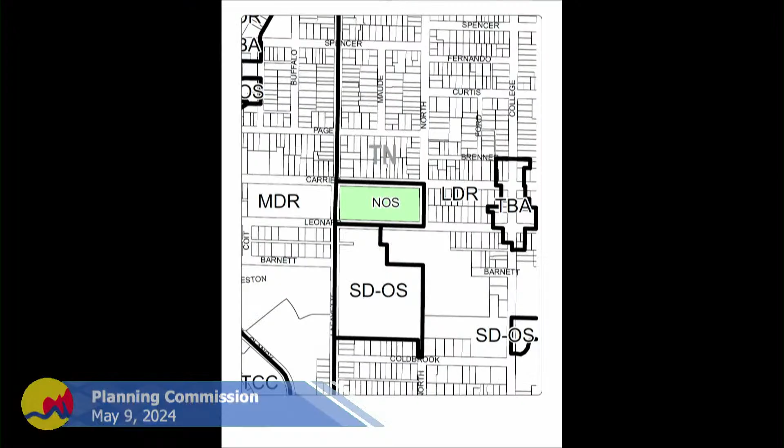The first item on the agenda is 385 Leonard Street Northeast. The applicant is proposing construction of approximately a 186 unit, 5-story apartment building with a commercial component on the same parcel as the existing Sun Title office building, with some shared uses on the site. A parking waiver is also requested.

Along with the Sun Title offices, the YMCA of Greater Grand Rapids uses a previously existing commercial kitchen, both of which will continue. The reason this is going forward to the Planning Commission today is because the property is currently zoned NOS, Neighborhood Office Service, and the Neighborhood Office Service could not support the project as proposed, both from a density standpoint as well as height. This also would facilitate the mixed uses on the site.

The property is zoned NOS, and we've got residential to the north and east, medium low density residential. We have Mary Waters Park and Grand Rapids Public School to the south, and I believe this school is slated to be closed. To the west, we have St. Alphonsus Church, and we have a couple of zone districts there. To the west of Lafayette is the MDR zone district, mixed density residential, which allows a higher density of residential uses than would be found in the TN-LDR, low density residential zone district. The park to the south is zoned open space.

Sun Title occupies the existing improvements on the site. I want to tell you a little bit about what used to be on the site, this building. We did some quick research this morning with a couple of other planners along with archives, and we found that it was the St. John's Orphan Asylum, and it was actually where the Sun Title building is.

We had assumed it was over on the west part of the site where this new building is proposed, but that is not true. We could not find any buildings ever being constructed there. It looked like St. John's Orphan Home had several additions over time, and it looked like this. It was pretty amazing.

So anyway, this is what was on the site previously. It was a pretty substantial building, and it was fairly tall. We just wanted to show you. And this is what is being proposed today. This is also a substantial building, proposed on that west side of the site, the vacant part which we think never has been improved. It ranges between 4 and 5 stories in height because of the grade.

The matter of the grade is really a substantial part of the story here, which the applicant can cover much better than me, but that does influence the design of the building.

The entire property, including the existing improvements on the site, is about 3.4 acres, and the existing building is about 30,000 square feet. It's pretty sizable, and it has 58 parking spaces. There are retaining walls around because of the grade change.

I do want to point out that in the past, up until 2021, this site was zoned TN-LDR, like the property around it. That's because it was the St. John's Home, and then Hope Network bought it, but it was really kind of an institutional use. It was residential, but institutional, so TN-LDR was appropriate. Then Sun Title wanted to purchase the site and occupy the building, and NOS was an appropriate rezoning, so they've been using it since then.

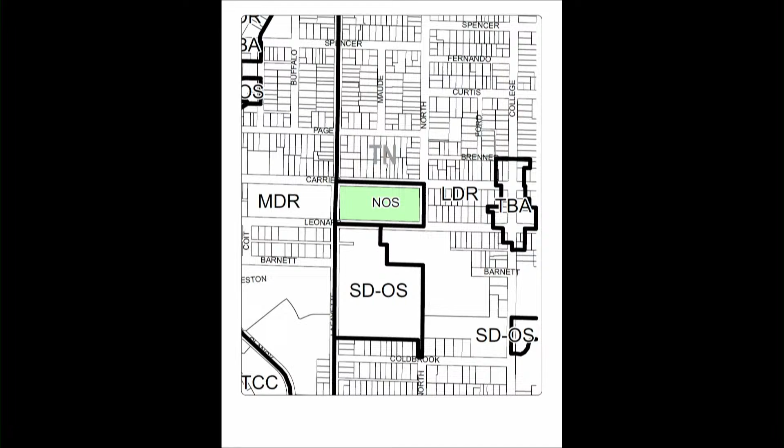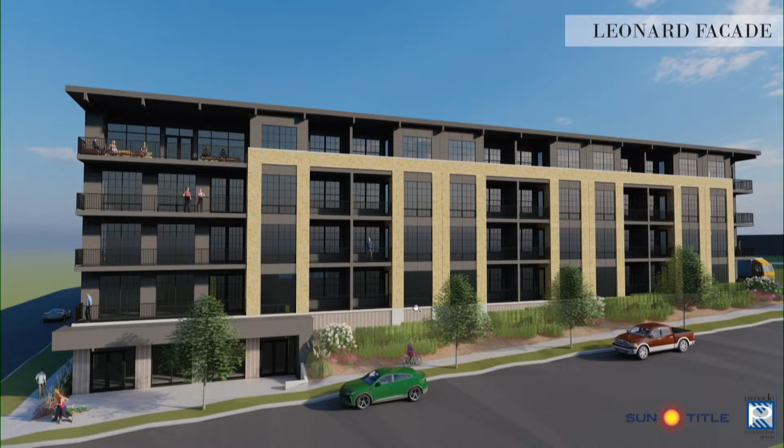So a 5-story courtyard-style building is proposed on the site. It will vary between an appearance of 4 stories and 5 stories, depending on where on the site you are. You can see it's tallest at the corner of Leonard and Lafayette.

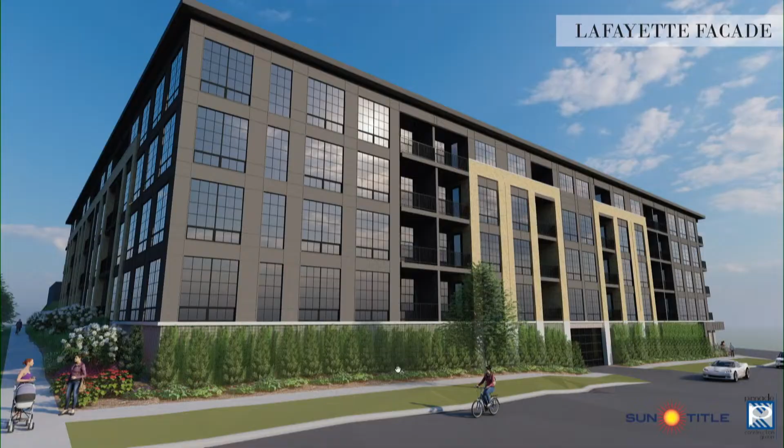This is the move-in area, the loading zone for move-ins. Actually, I'm going to go back here.

At the corner of Lafayette and Leonard is a small commercial component, about 622 square feet. The applicant intends to have it utilized as a coffee shop, at least initially.

Relative to parking, parking is proposed in an underground, well, partially underground deck. That's what you can see at this lower level. This slide is showing the Lafayette side, and approximately in the middle is the proposed access to the parking garage. I do want to mention that the location of the parking garage entrance was actually decided with input from Mobile GR.

The plans themselves show 181 dwelling units. However, the applicant is asking for approval of up to 186 units. That would allow them some flexibility for reconfiguration of units depending on market demand. I should mention that the parking analysis was based on that higher number.

86 of the proposed units, if we're going on the 181 units as the plans are shown, are proposed to be studios of about 400 square feet, and by our definition, those would be micro units. 91 are proposed to be one-bedroom units of 520 to about 650 square feet, and then 4 two-bedroom units are proposed with 900 square feet each.

The units are proposed to have a balcony or a porch, most of them at least. There'll be a lounge, and the Sun Title building does have a large gym, as it was a children's home, and I understand that use of that gym space is proposed for the residents. The applicant can talk about how that will be outfitted - I'm sure it will be a fitness gym for use of those residents.

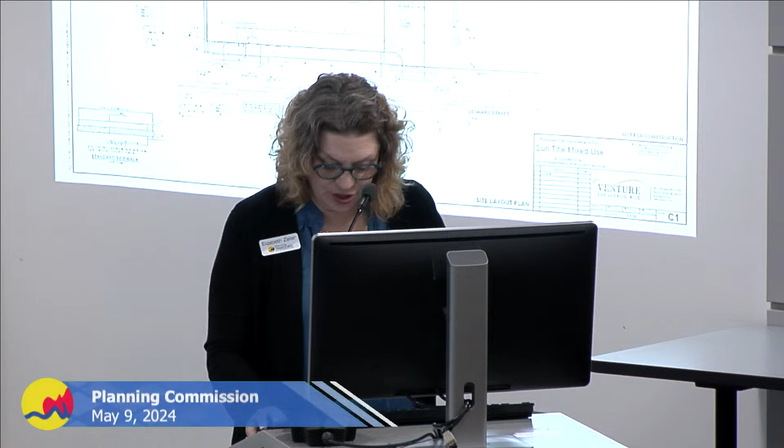So in the packet, you will see that on Leonard Street, a setback of 20 feet from back of curb is proposed. The existing Sun Title building is about 30 feet, so it's a bit closer. On Lafayette, the St. Alphonsus building is about 30 feet from back of curb, and they're proposing a range of 19 to 23 feet - again, about 20 feet there.

But because, I'm assuming it's because the road isn't aligned correctly, it varies according to the location on the site. And then Carrier Street - now, Carrier Street is where we've got residential uses across the street. On the north side of the street, there's a required building line or an established building line of those homes of about 28 feet. The Sun Title building's 23 feet, and they're proposing 30 feet.

So the Planning Commission should please look at what's surrounding and determine if the proposed setbacks are appropriate. I do want to correct something in the staff report. I neglected to add that in TN districts, which surround this property, the Planning Commission can go to a setback to the lot line of 0 feet.

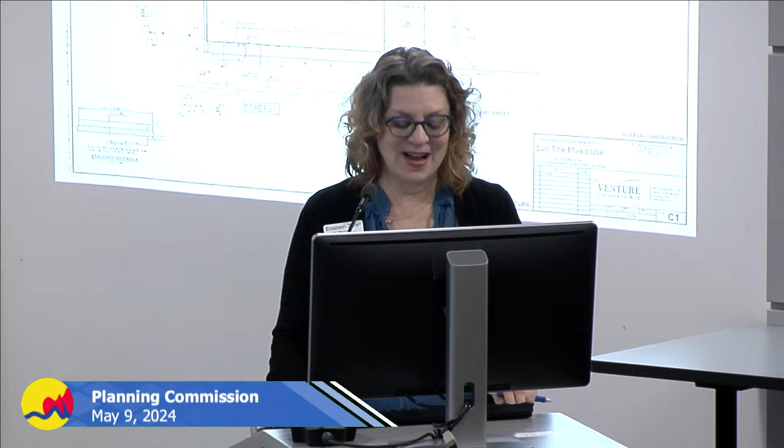You may notice that down at the southwest corner, we have a setback from the lot line of about 2.5 feet. It's 19 feet from back of curb, which is what we use when talking about a required building line. But for the purposes of the PRD, it's about 2.4 feet, 6.7 feet, 9.6 feet, and 10.7 feet. So in sum, the Planning Commission does have the discretion to allow the setbacks as proposed.

I'd like to talk a little bit about green space. PRDs have a fairly low green space requirement of 15%. The NOS requires 30% for residential projects and 20% for mixed use. The applicant is proposing 29.8%. I would ask that the Planning Commission establish a number we can go on in the future in case slight changes need to be made. In the draft resolution, I suggested 25%, which gives them a little wiggle room if they need to add more sidewalk or something like that. But they are proposing 29.8%, so if you want to go with that, you could as well.

Additionally, for tree canopy, residential, the NOS zone district requires 26%, the PRD requires 12%, and the applicant is proposing 34.8%. So again, I suggested maybe 26%, which is the NOS requirement, but it's up to you.

Relative to height in this zone district, the NOS zone district allows no more than 2.5 stories, and the PRD allows 55 feet and 4 stories. But of course that is something that can be modified. So we're looking at between 4 and 5 stories, and depending on where you are, the height ranges between 52 and 59 feet, so kind of in that 55-foot range.

Materials are brick and fiber cement panel. The building has been appropriately designed relative to pedestrian entrances. We've got that at the corner. And transparency—lots of transparency. We have transparency for that commercial use, almost all windows, and then the residential portion has a significant amount of transparency as well.

I would think that the discussion about transparency might really focus on the portion of the parking structure that is visible, and that might also be part of the facade variation portion of the zoning ordinance. The applicant could probably talk about this in greater detail, but you can see on these renderings that there is some detail that continues into the concrete of the parking deck to provide some relief. So that pattern is supposed to provide some visual interest and break up that expansive wall.

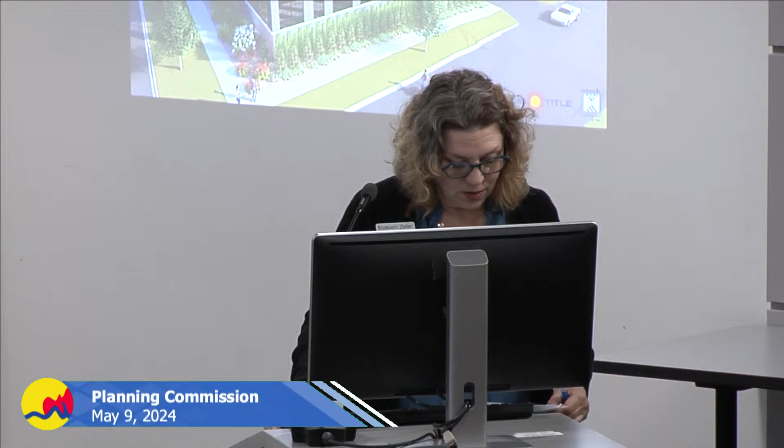Relative to density, the NOS zone district does allow residential uses as a primary use—it doesn't have to be a mixed-use development. You could do a residential development in the NOS, and on this entire site, including the Sun Title portion, the site could support up to 155 dwelling units. 186 dwelling units are being proposed, so the Planning Commission should consider whether this density is appropriate.

Some things the Planning Commission may wish to consider are transit, the availability of transit in the vicinity, and the fact that the current zone district does allow a relatively high density. You might also wish to consider that a significant number of the units are intended to be quite small—they're intended to be studios, and by our definition, they are micro units, about 400 square feet.

I'd like to mention that in the other mixed-use commercial zone districts, such as the TCC, the TBA, or the C zone district, we actually don't even count micro units toward density. So the applicant is not asking for any kind of waiver along those lines, but I just want to mention that because I do think it is something that we allow in other locations.

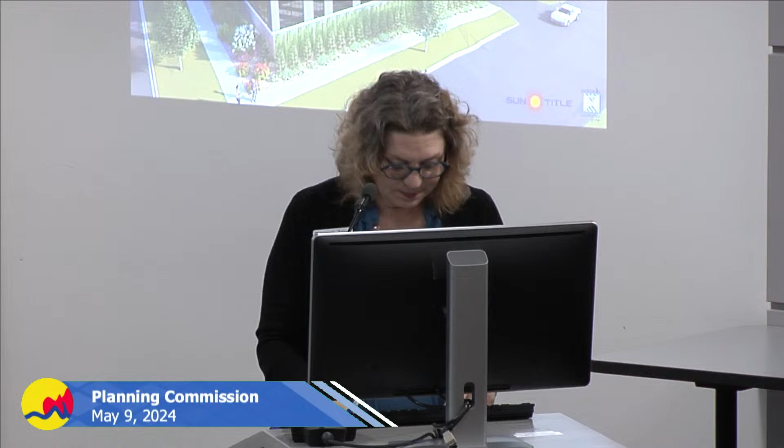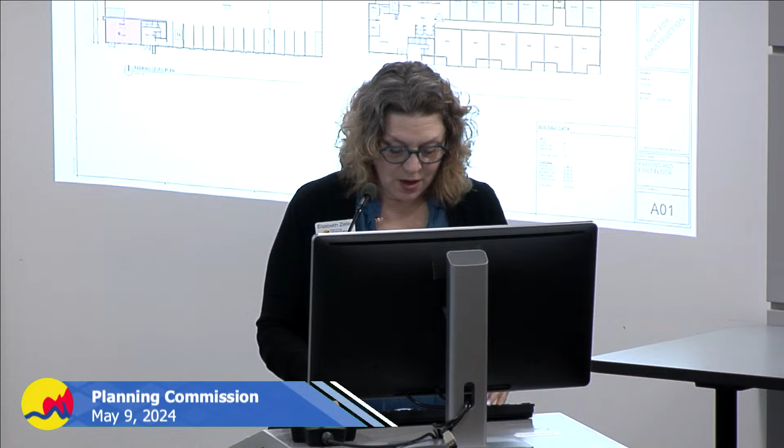On to parking. We have an interior parking structure proposed to have 78 spaces. Using either the PRD or the NOS parking requirements, which are higher than say our TBA or TCC parking requirements, 283 parking spaces are required. So it has a significant deficiency.

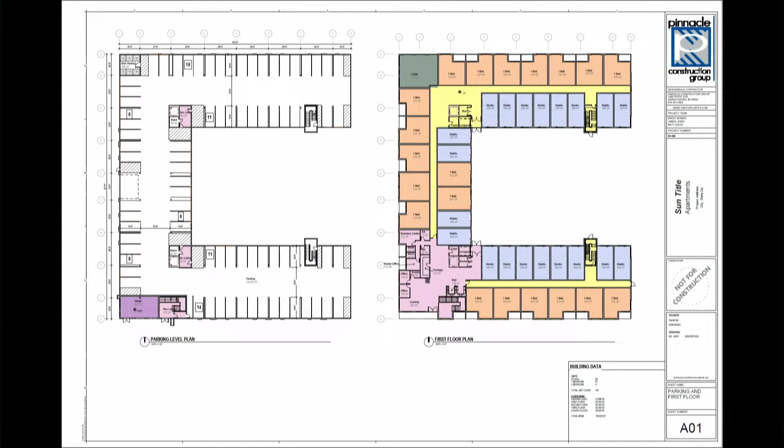The applicant is requesting that the parking be reduced based on available on-street parking, proximity to transit, and alternative vehicle parking. On Leonard, there are two bus lines that serve the site, so the site is well served by transit. There is on-street parking, but not all around.

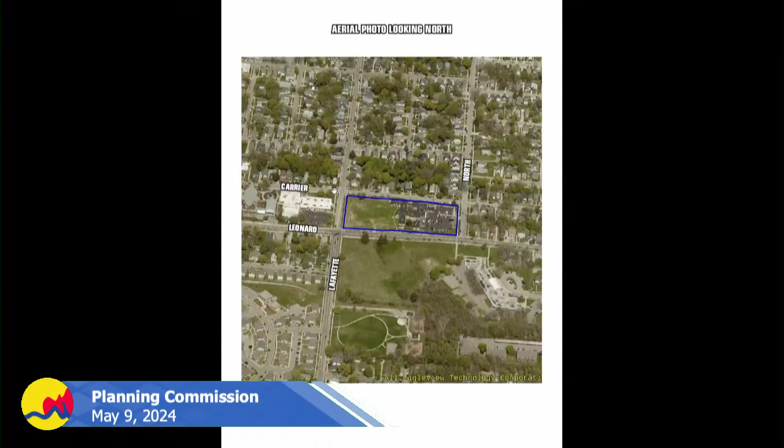I'll go back to the aerial photo. Leonard and Lafayette do not have any on-street parking. Carrier does, however - I meant to take a screenshot and include it here - but on the portion of the site that's going to be developed, we've got green infrastructure there. There's a rain garden, so that must have been done when the street was redone. It's not possible to have parking immediately north of the site. There are parking spaces adjacent to the Sun Title portion.

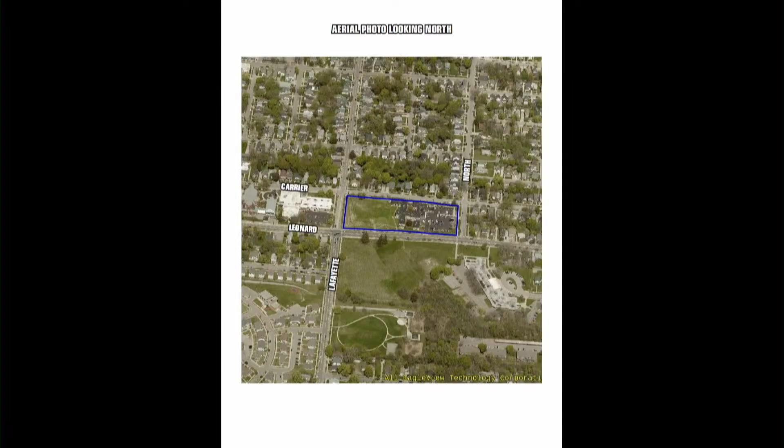Six alternative vehicle parking spaces are proposed within the garage, and that is a reduction. There's also a parking reduction allowed for micro units, where parking for micro units can be reduced by half a space, as long as two enclosed bike parking spaces are provided per unit.

So the applicant is not proposing - they're not calling them micro units - to have any kind of waiver for density or parking, but again, I did want to mention this to you.

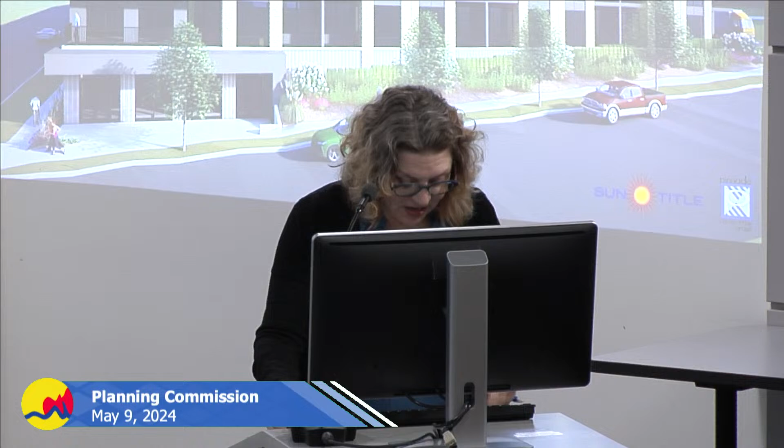That being said, the project won't meet the full bike parking requirement. They are proposing 56 bike spaces inside, and for a development of this number of units, they would need 103 bike parking spaces. So they're asking for a waiver of 47 bike parking spaces. You might balance that with that micro unit density and parking issue. I don't have an answer for you, but it's something to think about.

Relative to traffic impacts, the applicant did do a trip generation analysis. They worked with Mobile GR on that. I did not include that in my staff report, but Mobile GR did review that analysis and agreed with the conclusions of the letter that trip generation for this project is anticipated to be minimal and does not warrant a traffic impact study.

I believe we might have John Bartlett here from Mobile GR, should you have any questions about traffic impacts.

On to signage. The applicant requests that this retail component, the uses that would be there, be subject to the use table for the TN-TBA zone district. And it would be appropriate to also assign TN-TBA for signage. Staff is amenable to that - we feel that would also be appropriate. It is a very small space.

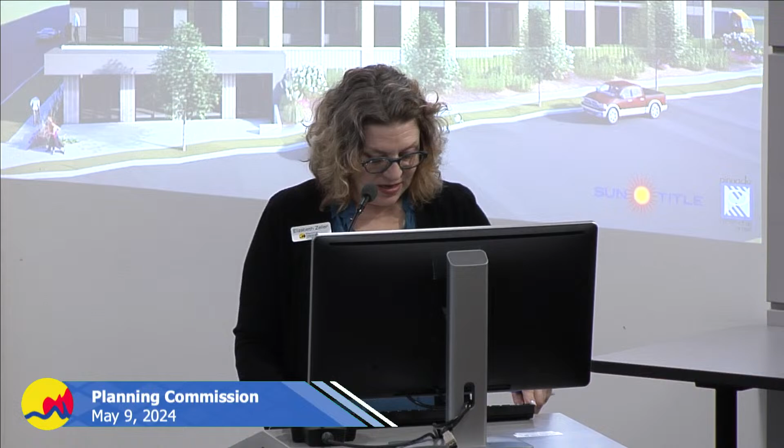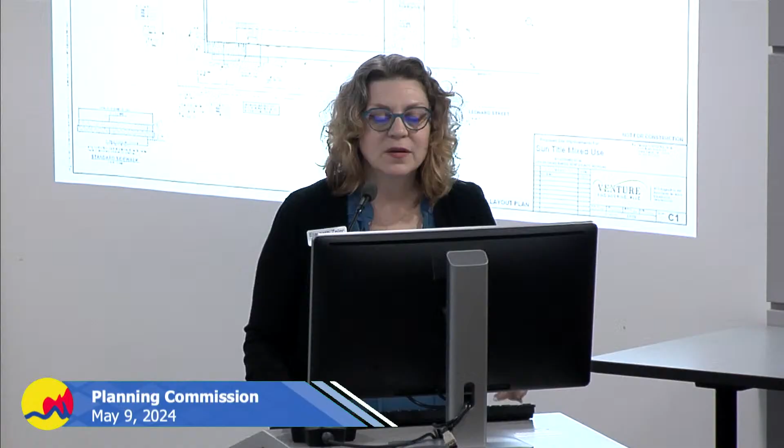Did you have any questions for me on this portion of the site before I move over to the Sun Title portion? Okay. Let's see, not sure what slide I should use here. I will use this one.

As I mentioned, Sun Title is a title company. They own the site and intend to continue their office use on the site. They've got 58 parking spaces.

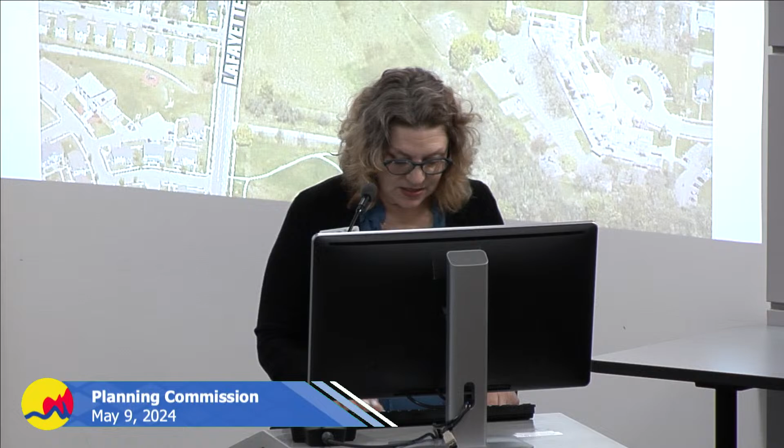You know what, I think I'll go back to this aerial photo. They have 58 parking spaces on site, and that's 29 fewer than what is required for the significant amount of floor area of the office use.

And we granted Sun Title director review for deferred parking. Sun Title said, we don't need as many parking spaces as what you're requiring, can we just build them if we need to? So we did a parking deferral agreement, and Sun Title today is saying we're never going to need these spaces, and we're asking you to formally waive those additional 29 parking spaces.

I can have the applicant talk a little more about that if you have any questions. One thing that we might want to consider is just to confirm that the accessory use of the YMCA using the commercial kitchen will not have any conflict with parking demand there.

Relative to this portion of the site, the applicant is requesting, and staff finds it appropriate, to establish the NOS zone district for both uses and signage. So we'd have sort of differences on the two halves of the site.

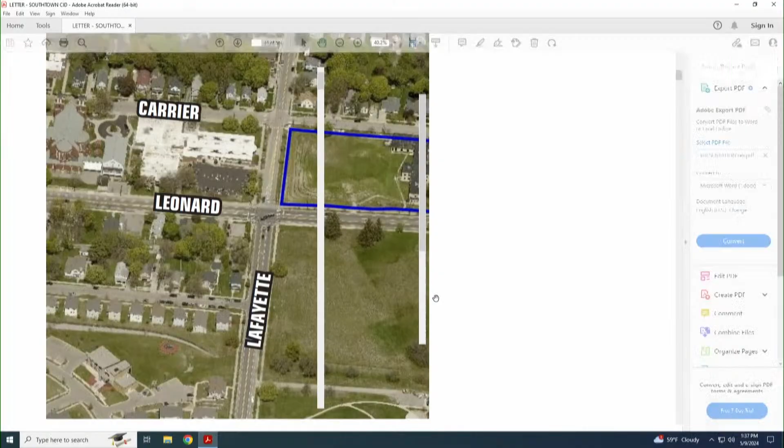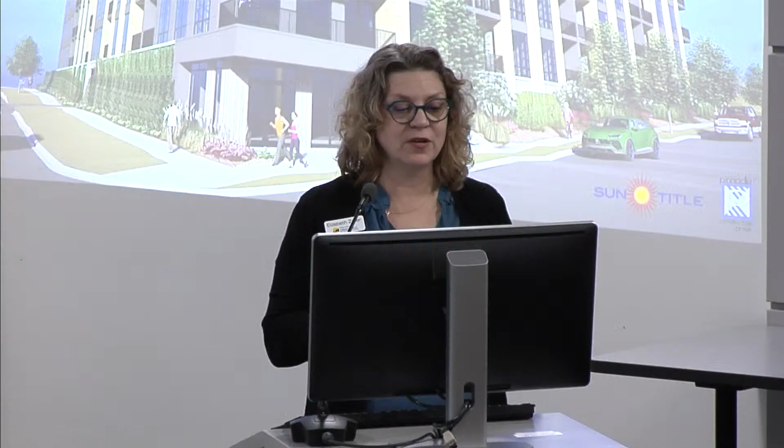So, in sum, we're looking at a primarily residential building with up to 186 dwelling units between 4 and 5 stories. I will be happy to answer any questions or turn it over to the applicant, and I think they'll be able to better describe why they came up with this design and some of their approaches toward dealing with that grade change on the site.

Any questions for Elizabeth? I have one. If the space for commercial doesn't work out as commercial, would they be permitted to put in residential in that space?

Well, that's an excellent question. As proposed, we don't really address that, but that would be an excellent thing to consider and maybe incorporate into the development or into the conditions of approval. I don't know if we'd want to add one more dwelling unit. Right now we have, well, we noticed for...

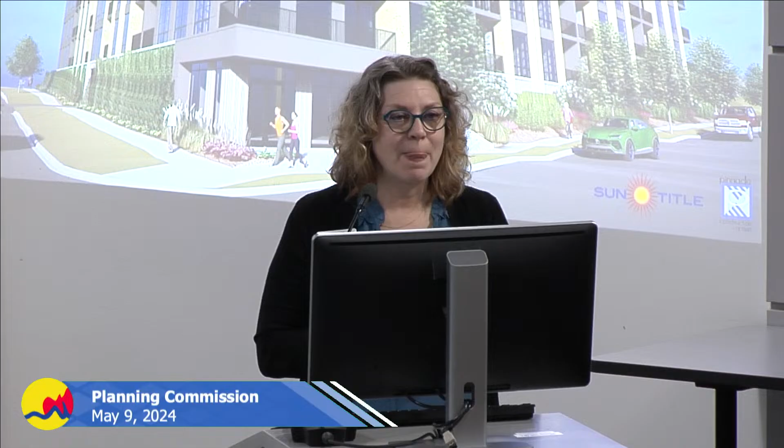186. I think right now, because of the way it's been noticed with the specific number of parking waivers as well as the number of units, any increase in residential density, and because it's a PRD, would likely necessitate it to come back before the city for that kind of modification. Unless they stay within the 186 dwelling units. But potentially, then it impacts the amount of required parking.

Oh, no, it wouldn't. I'm sorry. You're right. And I think it also depends on whether or not that commercial space is material to the decision of whether or not you feel that it meets the standards. If it's immaterial, then we have more flexibility. I'm thinking, of course, of other developments who have come back to request that. So, thank you.

Shall I turn it over to the applicant then? Okay.

Yep, so I'll take this, but you can advance and go back or use this. I know where everything is on here, so when you're talking, I can advance to what you need. I appreciate it.

Thank you. All right, good afternoon. My name is Lawrence Duttler. I'm one of the co-owners of Sun Title. I'm here with my business partner, Tom, and the folks from Pinnacle who are partnering with us on this project.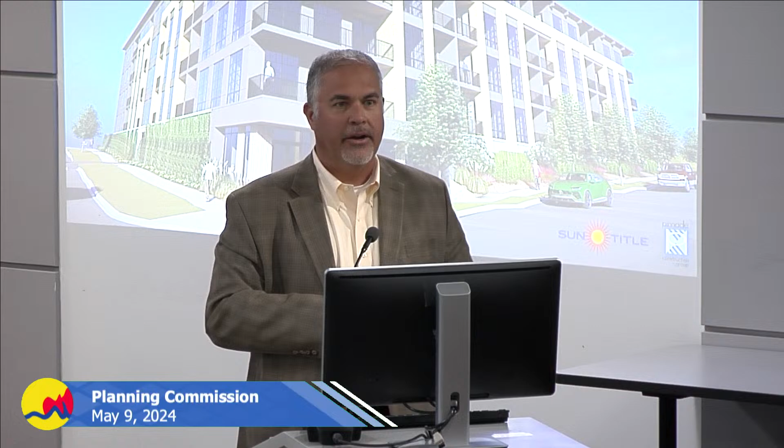I thought it would be good to start from the beginning of how we acquired this entire site. Our journey into Creston started in 2003 when we purchased our first building right there in the core of Creston. At the time, we liked the neighborhood, and it was a perfect spot between his house and my house. It was just great, and we fell in love with the district.

We've been there for over 20 years, improving buildings and houses and things like that. So we love the neighborhood. We've got great relationships, as you can see from the letters of support, with the neighborhood association and the business association. It's always been our vision to turn this entire community into the gem it has become. It's amazing looking at some of the other developments going on right next to our Sun Title building. It's been beautiful, and we're excited about what's happening in Creston. It's always been a great neighborhood, and it's starting to get the attention it deserves.

We were in the middle of COVID, running out of space at our corporate headquarters. We had purchased a number of buildings on the corner of Spencer and Plainfield and just started running out of space. So I did a very scientific approach, knowing we wanted to stay in Grand Rapids, stay in Creston, and I went to Google Maps and zoomed out. There was this big spot right by us, and I zoomed in, and it turned out it was owned by Hope Network at the time, and it was for sale. It was part of their Pivot program where they were helping people coming out of drug rehab or prison re-enter society, so they were using it as quasi-residential.

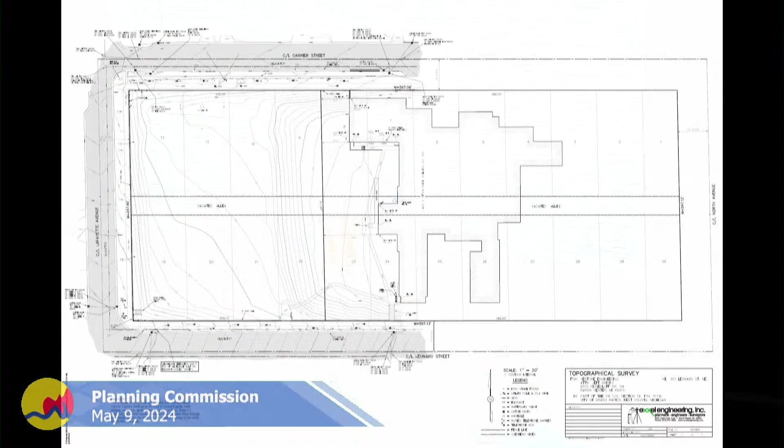We don't have anybody right now that's even considering parking on the street or anything like that. So from a parking perspective, it's a little weird because if you just look at the overall square footage of the building, it takes into account this enormous gym, our big break room. What you don't see here is there's a gigantic interior courtyard that we've got picnic tables and umbrellas and nice landscaping area for people to have lunch and the like. So what you're seeing here is the building outline from the outside, but you don't see even just the interior space there. It's a unique building.

Also from a parking, when we start thinking about transportation, we were working quite a bit with Pinnacle just on the parking spaces and what that impacts, because we work there. We've got offices all around, and we work and live there, right? So it was interesting, I actually went onto the bus routes, and I'm like, okay, if we say we're on bus routes, what does it really mean, right?

Well, you could take a bus from this building to Family Fare, right down the road. It's 9 minutes, 1 bus, no changes, right? Just a straight shot, a one-shot approach. You can get to Van Andel Arena, it takes you 14 minutes, and it's 1 bus, no transfers. You can get to the Medical Mile, 9 minutes, 1 bus all the way down. So it's a beautifully located building.

And as we were looking at the size of the apartments and the affordability of these things, that was a key component with our employees. Title insurance still, we hire a lot of folks that don't go to college and they've got high school degrees. It's a great opportunity to have a professional office career, but still finding affordable housing is so challenging. So I think that was another really real breakthrough with how Pinnacle designed this with these slightly smaller units, and just the ability to reduce the cost of those units to residents, because our vision for it really is it's an opportunity for us to have our own employees have opportunities to stay here as well.

And so between the folks that are working on the Medical Mile and all up and down Leonard and even up and down Plainfield, it's a compelling case for how you can design a site and design units that really can be affordable. Our community outreach is going to continue.

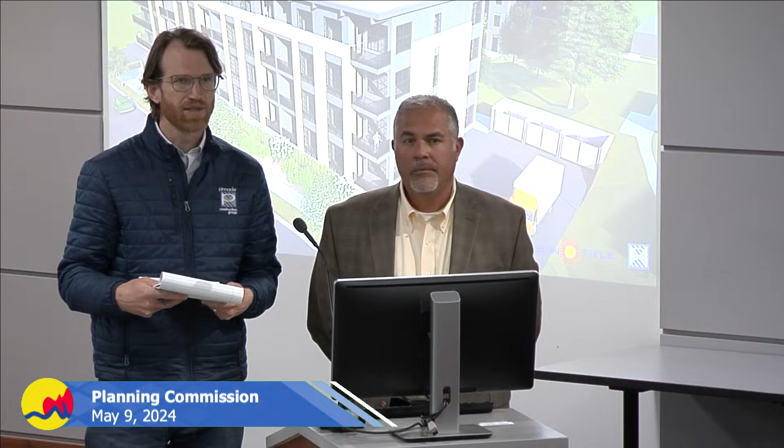We looked at other ideas of bringing surface parking into the courtyard, but then you lose a lot of green space and it's not nearly as nice of an amenity. We really don't think that the market is demanding the parking at even close to a 1-to-1 or half. We think it's less than a half of a space to unit ratio for this type of unit.

It's on the 2 bus lines, which is really excellent. The bike lanes are right in front of it. You can walk down to the DASH as well. There really isn't many better sites in town from an alternate transportation standpoint.

And if you're wrong, where will people park? Well, it was not an official study, but we went around and counted the spaces a block in any direction, and we counted at least another 50 on-street parking spaces available within a reasonable walk of the entrances to the property.

There's also what you're talking about at St. Alphonsus. Yeah, St. Alphonsus is right across the street. They've got plans for what they're doing with their center there. They've got parking. I know that they are also struggling with some parking even on Sundays and things like that. So there might even be some cross opportunities there to work arrangements with them if necessary.

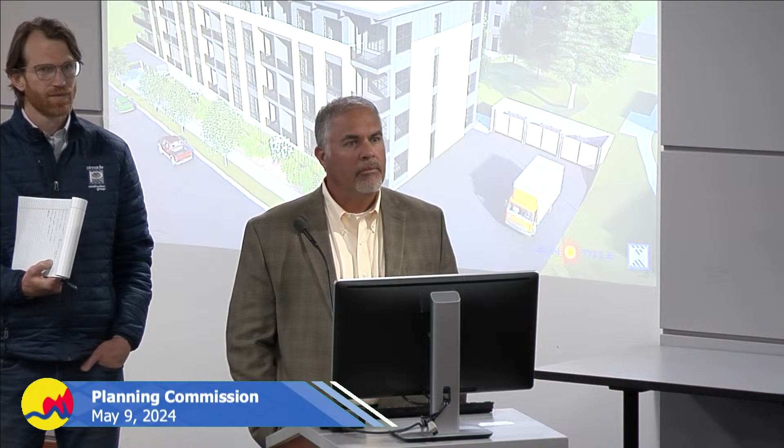Any other questions for the applicant? I had a couple for you.

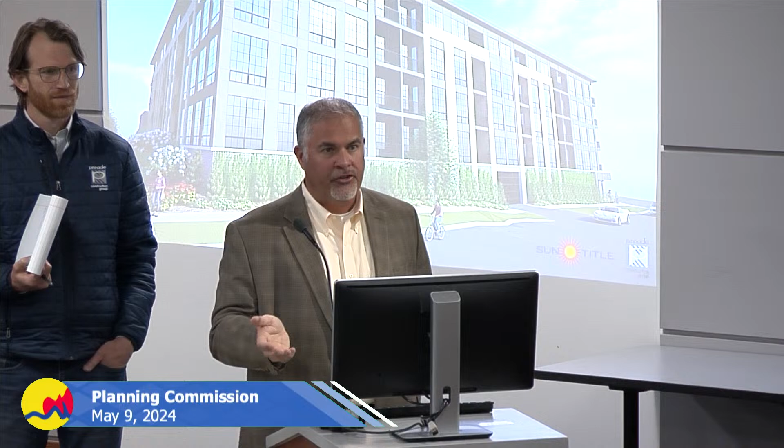Regarding the green screens facing west, how confident are you that those are possible, in terms of their ability to be maintained and vibrancy? Right now we've got the sidewalk right up against a brick wall. Now we've got quite a bit of space from the sidewalk to that entrance area. So I think the short answer is, our plan is to use Michigan foliage, that kind of thing, to make sure it's hardy enough to sustain throughout the winters.

We want it to look nice. When we were staying in Creston, I get off at the Leonard Street exit and have been for about 20 years off 131, so I didn't want to have to change the exit because I think I'd miss my exit all the time. We live in this area, we drive this area. We want it to look nice, and we take a lot of pride in the work that we do. If you were to walk through our facility, changing the St. John's home into our corporate headquarters, it's better space than we deserve. It's beautiful. I think we share the same goals.

My experience with green walls and green screens makes me question whether that's viable. Mostly I'm wondering, if it's not viable, are you willing to supplement with additional landscaping that can be replanted at a future date should the green screen not be viable? I would think we would have every intent to do that. Thank you. I agree, it's sometimes the vines that grow up and things like that. We've experienced that, and we want it to look nice.

I want to make sure we go through the grades in detail, particularly along the Carrier side. Looking at the street grades, it looks like we're ranging from about 700 to 703 elevation, and your finished floor is at 709. So that's about 6 to 9 feet above the street, give or take. I couldn't tell what the sidewalk grades are, but that's about right?

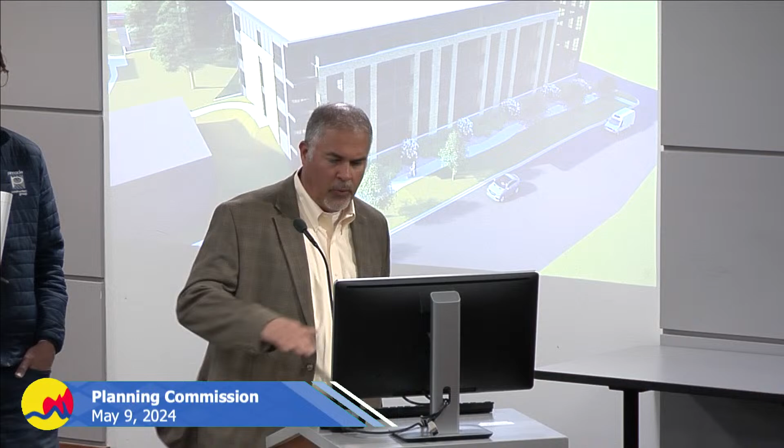Yeah, one way to get a visual of where that deck sits in relation to Carrier is if you follow that wall along from our building to that first corner there, that's about the same grade level as the deck. And it's the parking garage that's below that. Understood, so again, give or take, you're about 6 to 9 feet above sidewalk grade.

You're mitigating that elevation change through landscaping, which I think is good. In light of the fact that you've got 2-story homes across the street, and this is a pretty tall 4-story building, was there ever consideration to doing a step back, losing what looks to be 8 units on that 4th floor, only on that elevation, to try to better transition into the neighborhood? Was that ever considered, and if it couldn't work, can you help me understand why?

Yeah, James could probably speak to it a little bit. I know when we were talking about the parking area, what's below that floor line is obviously the underground parking, so it would be not just pushing units back, but pushing parking back as well, I think. Is that what you're describing?

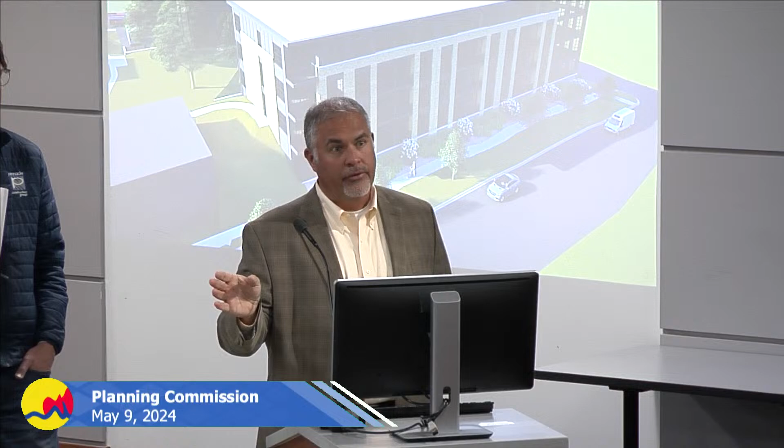Nope. I understand why the finished floor of the first usable floor is about 9 feet, because you've got the parking deck. But then you've got 4 floors of apartments on top. I'm just curious whether that 4th floor of residential units on Carrier is necessary, only in the fact that taking out those 8 units-ish might be a better scale.

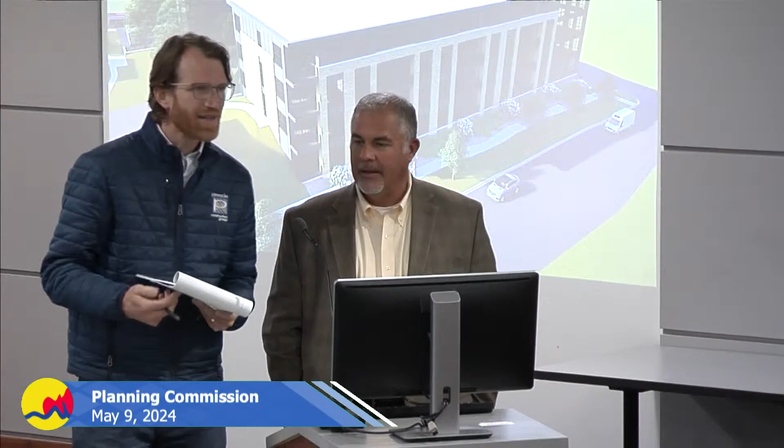Yeah, I can speak to that. Let's take a step back — one thing that hasn't been brought up much in this meeting is we also did a geotechnical study of the site and found there's less dense soil than we'd want for regular spread footing along much of the perimeter of where we wanted to put the building. That kind of started the story of how do we develop the site in a way that maximizes it but is also as cost-effective per unit as possible.

So that unsuitable soil conversation, as well as all the grade change, really led us into the underground parking scenario, where you aren't seeing residential buildings with underground parking very much, and certainly not in this area. This is a significant expense for the project in order to get any sort of residential project here to work. So sharing the load of the parking garage on a per-unit basis is an important consideration for getting this project developed.

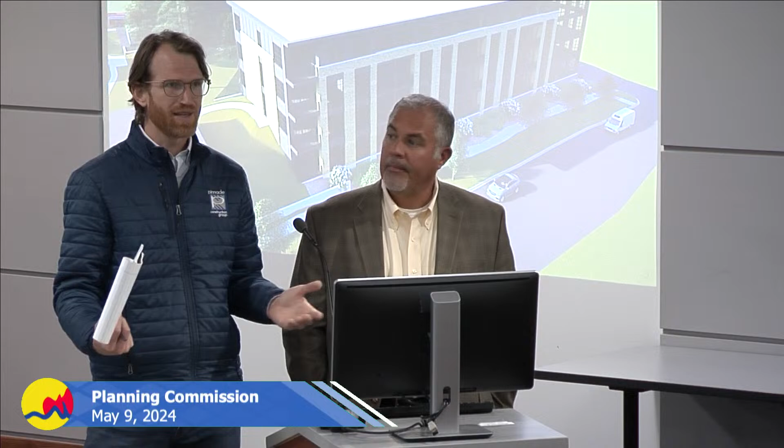One thing we also haven't talked about is our next step in this whole process: the incentives from the Economic Development Department. We're applying for a neighborhood enterprise zone tax abatement, which is predicated on the small retail portion of the building — that's still state legislation that needs to be there. We do have a plan for if that doesn't work out, and it just becomes more building amenity space, maybe a shared co-working space for the building, or an internal coffee shop for residents.

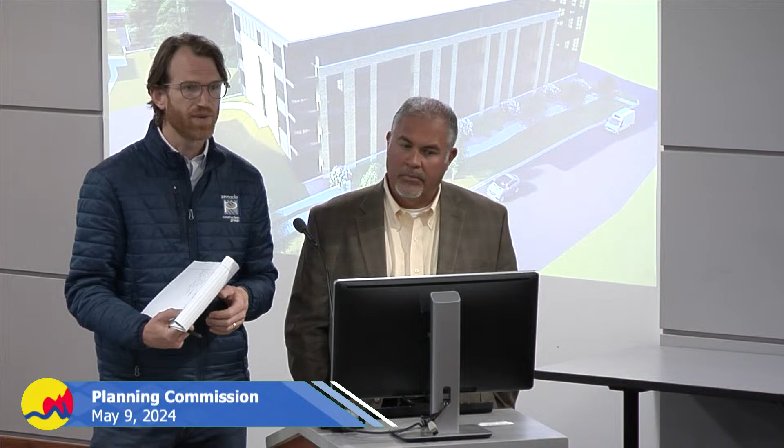But that's what's pushing that decision that way. Unfortunately it's a little bit of tail wagging the dog, but it is what it is, and it's an important resource for the project. The other part will be a significant brownfield TIF on the project — for the underground parking, the unsuitable soils, but we'll also be pursuing the new housing brownfield, which is what will provide the compliance mechanism for the affordable units.

And with that housing brownfield, if it gets passed — it's not up to us whether it makes it through or not — but if it does get passed, we'd be at a 20% ratio of units within the affordability range, as defined by the new brownfield housing program. So instead of 10, it'd be 37 units.

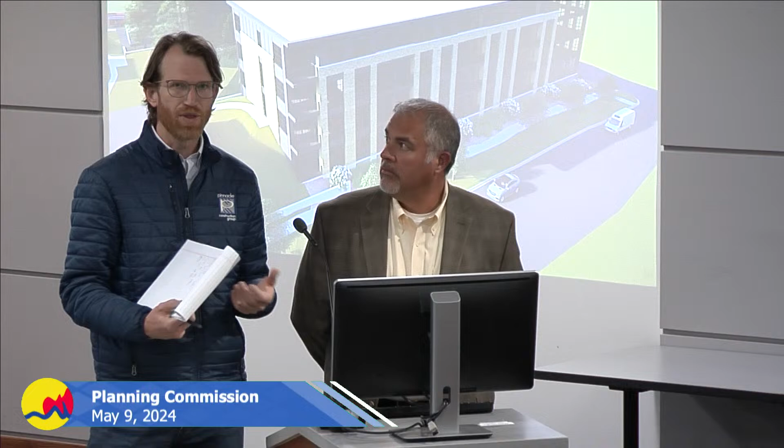Did that answer your question? On the step back, it did.

I just think it's important that the community and the planning commission see the grade change, and that's always tricky, and I feel like it's my job to point it out. But also, I think a step back from a scale and massing perspective makes sense. However, soil suitability and the real world life of development performance also has to be considered. I just think it's important that we're transparent about those reasons, so that's why I asked the question. Appreciate the question.

Just because I've done this to other people, I want to be sure. Can you please clarify which parking level plan is correct, whether it's C1 or A01? C1 has a significantly larger bike parking area, which consequently shows less bike parking spaces than the smaller bike parking area. But I'm just curious which one we're approving, or which one we're looking at for this approval.

I guess I missed the coordination on that one. Can you show me C1? I'm assuming that A01 is correct. Yeah, A1 is the correct one, and it's a different bike storage system in there, where the A1 is looking at a two-tier system, and the C1 was looking at all wall-mounted hooks.

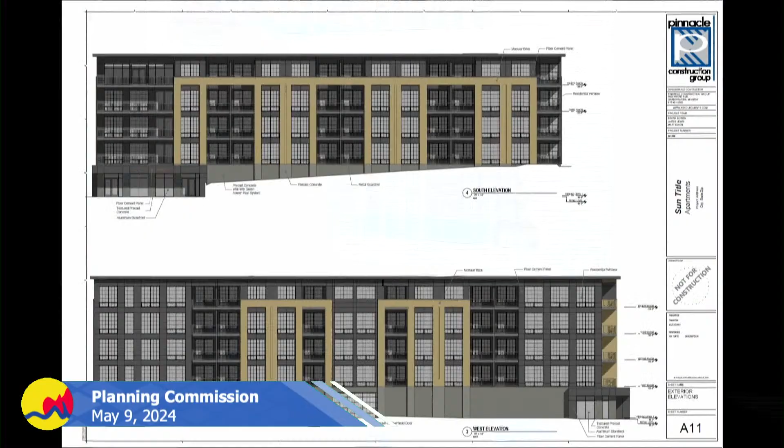Yeah, it's certainly physically possible. It makes it harder to condition the garage — the majority of it's underground, so we can keep it at temperature a lot easier if it's not open at all, and that idea kind of falls apart as soon as we start opening it up. I will say we're doing both arborvitaes, which will grow tall, as well as wall screening, so it's like trying to double up landscaping along that side just in case. But yeah, if that's what you want to see, it's certainly doable. Might not be our preference, and that's why we didn't go that way initially, but we definitely talked about the pros and cons of both ways.

Including windowed openings? More like a screened opening. I mean, it could be glass in there. Yeah, we didn't talk much about that version of it, but...

Okay, thank you. I appreciate the attention to this detail, and we know that Sun Title has an excellent track record in property management and development. We also have to plan for other owners who might eventually own the place.

Any other thoughts on the pedestrian experience? Any thoughts on the appropriateness of the density in this location? I'm not concerned with that at all. Yeah, no concern. I guess just to reiterate, this is a main street with access to good transit, and I think completely appropriate for this level of density.

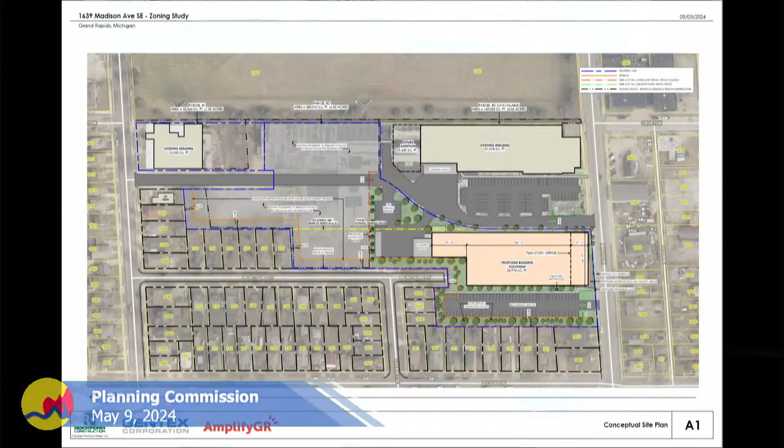As you will recall, the Planning Commission discussed the matter and asked that a number of items be addressed. I will not go over everything, but I'll go over what the Planning Commission requested, and I'll defer to the applicant to further explain some of those elements.

The Planning Commission asked that the plans graphically reflect the offer and that the conditional rezoning agreement align with that. The applicant has done that. That the number of parking spaces be limited to no more than what is permitted, with additional parking deferred until such time it is found to be warranted. That element will require a bit more discussion on my part and the applicant's.

That the Montgomery Street streetscape be brought up to city standards, and the applicant is amenable to that. That the architectural elevations include a masonry base, and the applicant has updated their plans to include that, which you can see on this rendering and on this one, and it's also on the architectural plans.

That the primary entrance to the building not be impeded by gated access. That has been addressed, and the applicant can further elaborate on that. That the potential for a landscape strip and street trees in the Madison Avenue Parkway be explored. I'll talk about that.

They have added bike racks and a pedestrian access gate at the main entry along Madison to support multiple means of employee transit to the building. The agreement has been revised to identify that the landscape and site lighting plans will comply with all zoning requirements.

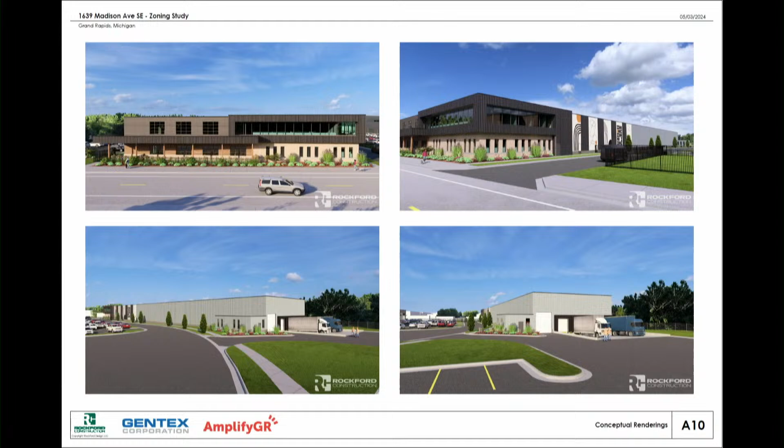With all the changes to the agreement, we missed one thing: the reference to this landscape area, this landscape buffer, was not included in the agreement, but that wasn't intentional, and the applicant will make that revision before it goes to City Commission.

A couple of things I do want the applicant to talk about: the operation of the vehicular and pedestrian access to the site via the gated entry, the need for the parking as proposed, and the need for the side building entrance.

I will talk a little bit about the parking. The Planning Commission really didn't want to see parking in excess of what was allowed, which would be 120% of the requirement.

Staff met with the applicant's team, and in talking about how they actually intend to use this building, we realized that their training area, which we had included in the office calculation, sounds like it's going to be much more intensively used than we had anticipated based on just the office use. So we recalculated that, which raised the number of parking spaces that would be required.

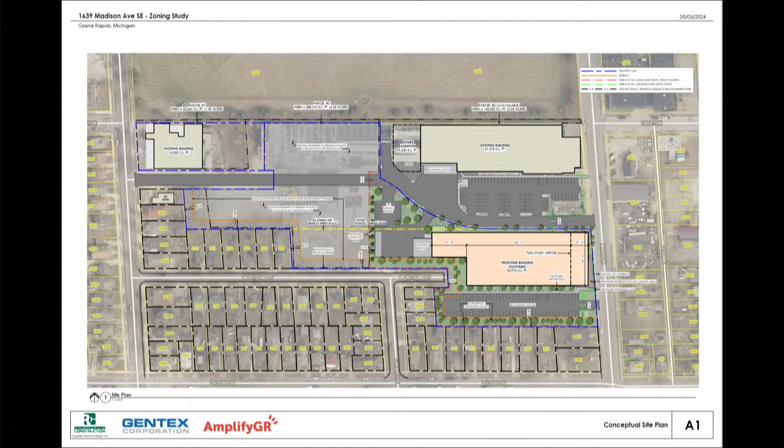The last thing I want to mention is the Madison Avenue right-of-way treatment. You might recall that the Planning Commission really wanted to see a more typical parkway treatment with a landscape strip, then the sidewalk, then the building, rather than having the sidewalk adjacent to the curb.

In the Vital Streets plan, a 6-foot sidewalk and an 8-foot parkway with a 6-foot wide landscape strip is recommended in this area. So really we do want what the Planning Commission was discussing. The problem is the width of the right-of-way in this area, and that is why at the adjacent building at 1601, they ended up with the same landscape treatment or streetscape treatment as what's being proposed here, with the sidewalk adjacent to the curb.

Now, the applicant is amenable to adding trees on their private property to provide what would be viewed as street trees. They have done some exercises to ensure that it would be possible, and it is. Based on my discussions, I believe they are amenable to adding trees on their private property to act as street trees between the sidewalk and their building. So with that, do you have any questions for me?

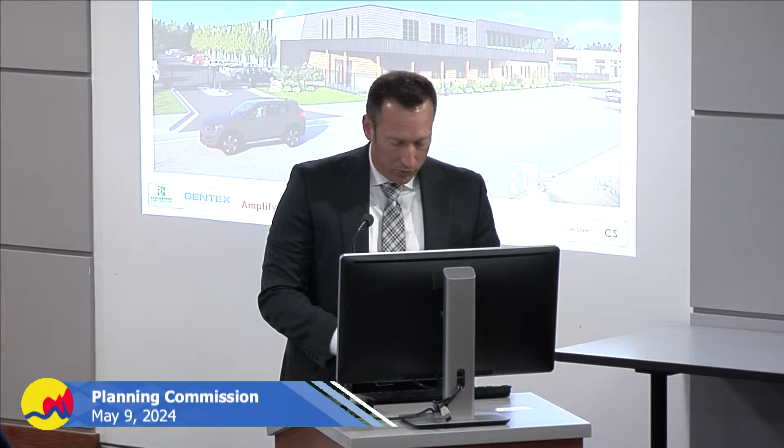Item 2 was the parking spaces. So you see in our information, we did break down how we got to the calculation. Again, thanks to city staff and all the discussion we had on this, really helping us understand and work through the definitions of some of the things we were looking at from that training area.

To get into the details a little bit, we thought the right calculation was the assembly calculation. Before, we were using education. And when we talked through those definitions, it was really education for how this body uses that word, and that wasn't really the right way to go about that calculation. So we did get to the 95 spots.

We did appreciate, Ms. Joseph, your recommendation on deferred parking. We're hesitant to do that right now, just based on our experiences. At our other facilities, we have tried to promote other ways of commuting to work and not just driving your own car. We've worked with bus passes. We've promoted carpooling. Unfortunately, we just haven't had a ton of success.

But again, if you look at one of the things we like about this project, it's its location within the city. So we do plan to work and use a lot of those same initiatives, even though we haven't been successful at other facilities, to work with the city to promote bus passes, promote carpooling. Obviously, we've talked a lot about walking, being next to the residential area, e-mobility. We talked about bike racks. So it is in the plans. We do want to promote it. We intend to promote it. Again, just based on our experiences, we're hesitant to reduce that number of parking spots right now, and we think, with the calculation, we got to the right number of 95.

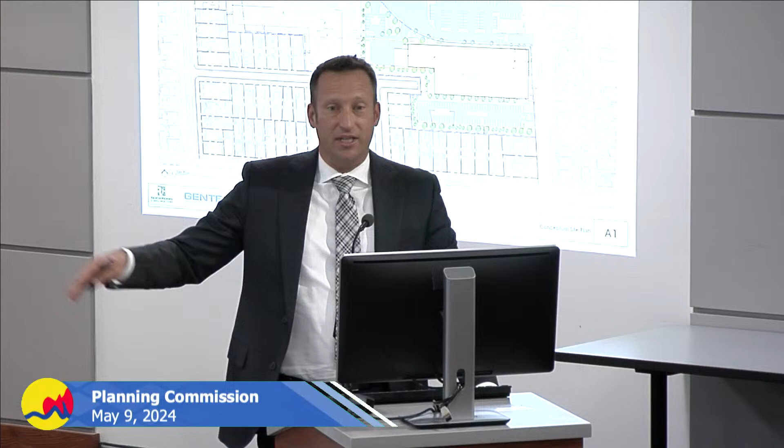65% of that left North America. So that's a lot of product that we made here that a lot of other companies would have made in other parts, not just the country, but other parts of the world. But we bring those jobs right here. And that's what we believe is practicing what we preach.

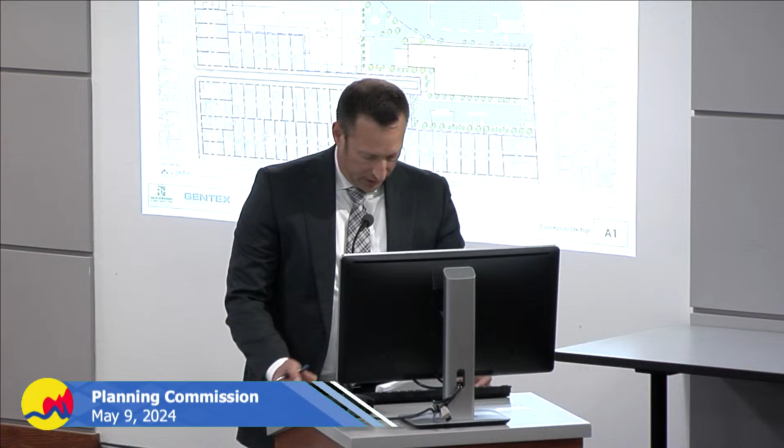So again, I ask you to look at our record and our reputation. We respect this process, and we want to continue to work with this commission and the city and its staff, along with the residents, to make this project a success. But yes, it is our true intention to bring great jobs with competitive compensation, benefits, in a clean manufacturing facility, and be part of a great revitalization project and continue to expand our efforts to take down barriers to employment such as transportation. So thank you for your time and consideration, and I assure you if we complete this CRA process, we'll continue to work with city staff and city engineering to ensure that all codes and ordinances are met. Thank you.

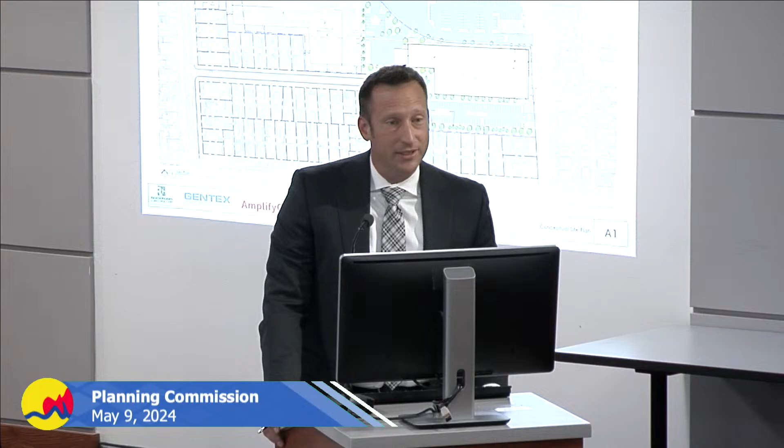Thank you, and we appreciate the attention to the details based on the last meeting and also to your commitment to the city. And it's pretty easy to see how easy it is to go out to a greenfield and build something with the parking and the entrance wherever you want it. And we appreciate your commitment here.

Thank you. Any questions for the applicant at this time? All right, then we'll turn to discussion.

Yeah, I guess I'll just start with the parking since that was my contribution to last meeting. I'm comfortable with their justification for the amount of parking based on the heavier use of the training space and the shift change considerations, and also appreciate the continued promotion of alternative modes and their intent to do that too. I would love it if they added street trees along the Madison frontage. I think that would be great. And I also appreciate adding direct pedestrian access from the sidewalk as well to the building. And I understand based on the items you're manufacturing, the security needs based on the contracts and requirements that you have with that. So yeah, thanks for the work to update the plan for us.